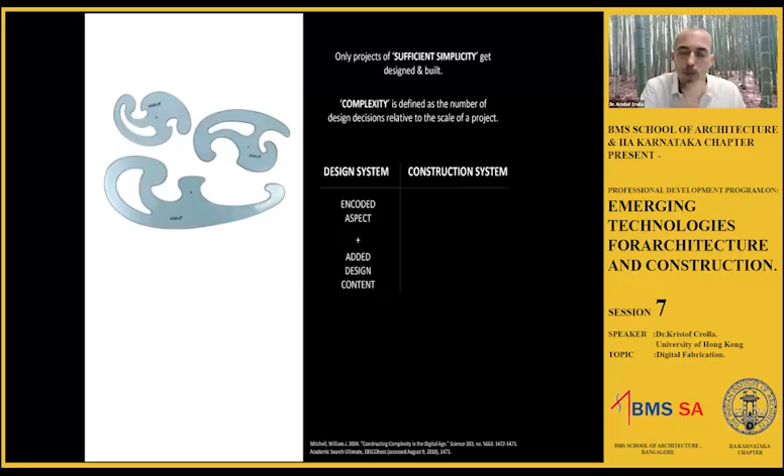Well, nowadays, these types of French curves, these rulers that were part of the encoded aspects of the design system, they've been replaced with NURBS modeling geometry, where without even needing to know any of the complex mathematics behind it, anybody can just draw a few points on the screen and automatically a perfect NURBS geometry curve will be generated in between it by the methods and the mathematics that have been encoded in the design systems that we're working with. So you can imagine that the complexity of designing or drawing curves has dropped dramatically, and our ability to clearly communicate those has increased dramatically.

So simplicity of construction is dependent on the tools and the techniques that we're working with. Now that's true not only for the design system, but also for the construction systems that we're working with. There too, you have encoded aspects and added construction content. For example, I'm from Belgium originally, where most of the architecture is made from bricks. If I would want to design a brick house in Belgium, I just need to give a few coordinates, and the craftsmen on site, with their years of expertise that they have, would easily be able to develop this brick project.

If I would do that in Hong Kong, however, where there's no brick architecture, it's all steel and concrete, the encoded aspects are much weaker. There's less of a craft available locally, so the complexity would increase because I would need to add a lot of construction content to make sure that they can implement it. Now, throughout history, innovative architects have not only worked in the added design content sector where most commercial practice takes place, but they've been addressing the encoded aspects as well, and both of the design and the construction system.

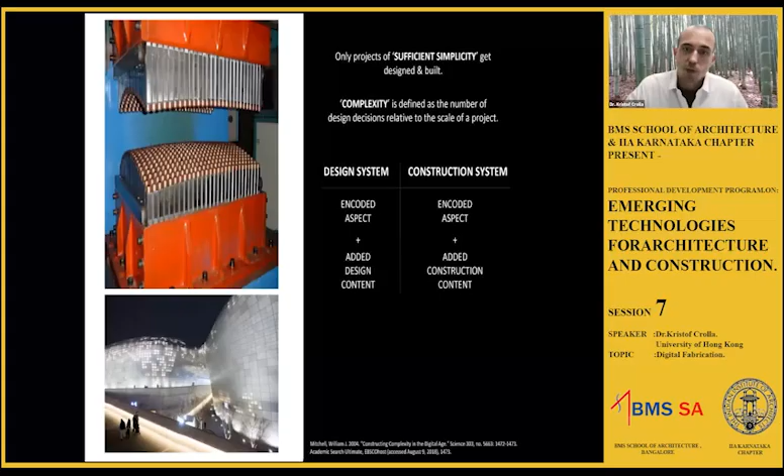So my claim is that innovative architectural design is more likely to happen if you tackle both encoded aspects and the added content to it, or at least there's a greater opportunity for innovation if you also challenge the tools that we're working with. What's very unique at this day and age, for the current generation of architects, is that because of computational technological evolution, we now have computational control of these encoded aspects, which dramatically opens the design solution space that we have at our disposal. So my work focuses on addressing innovation in architecture by tackling the encoded aspects and the added content in both the design and the construction systems.

Now, there's a few things that you should know to illustrate how paradigm shifting today's age can be. The first one is your washing machine at home has more computing power in it than NASA used to put a man on the moon. That's a fact. They don't make slow processors anymore the way they did back in the 60s. So computational power has become a resource that is available in abundance. It's everywhere to such a degree that we're even using it to do our laundry. So that's something that we can really tap into. Nicholas Negroponte, the founder of the Media Lab, said in '98 already that we should face it, the digital revolution is over.

Like air and drinking water, being digital will be noticed only by its absence, not its presence. And that's very true if you see how we communicate in this day and age. For example, here through this Zoom presentation, the digital technology is embedded in the system. We don't even see it. It's just there, and it allows for a radical change in how we communicate.

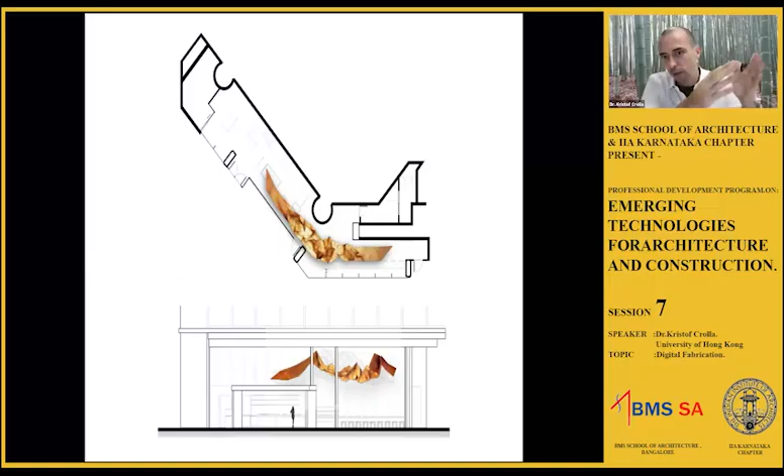And the story behind it was that if people take their time to enjoy their coffee, only then will they notice the slow changes that take place around them in a busy environment such as Hong Kong. And why I'm starting with this one is to illustrate that affect and spatial experience and emotional response to materiality is something that's central through our work. And throughout the talk, you'll see that I'll go from more affective, very emotional work to something that's much more rational and grounded. So please enjoy the first video.

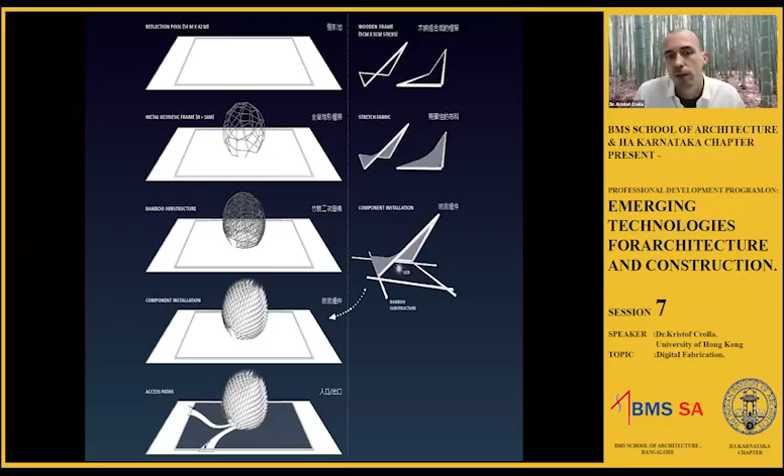So here you see the installation and the renders that we submitted for the competition. People would be able to go inside of it, where there would be all kinds of lanterns hanging, because the competition brief required a lantern of lanterns. And these are the actual competition documents that we submitted. So we said to build this, it's very easy. You just build a steel geodesic dome, you clad it with bamboo, then you put that component on it that I just sketched, and voila, you have the Burning Moon installation.

To our surprise, a few weeks after that, the client called us back and said, congratulations, you won. But under two conditions. First, burning in Chinese cultures has nothing to do with love or passion. Burning means destruction or sacrificing something to the gods. And there's no way that on the Moon Festival we're going to destroy the moon or sacrifice it to the gods. So we have to change the name.

It has to become Golden Moon. We said our joke doesn't work anymore, but whatever. The client said nobody got the joke anyway, so we agreed.

And then the second requirement was that we had to stick to this schedule, which was that from the drawings that I just showed you, we had 3 weeks time to develop a tender package, and then the government would organize a tender, and only 3 weeks before we would go on site, we'd know who was going to be building that. And then we would only have 11 days on site, 1 day for testing, 6 days of festival, and then 2 days of demolition, and that was it. And we're talking about a 6-story tall, complex, non-standard structure.

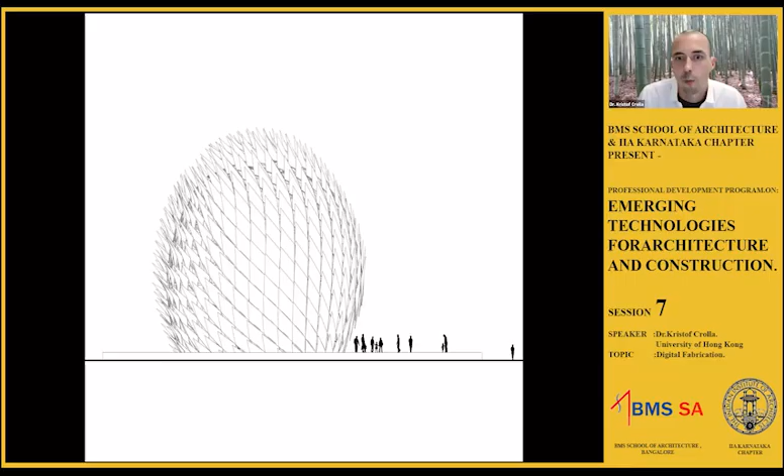The design didn't change much. We shrank the pool down a little bit, but in principle, it remained this pathway in the reflection pool that would take people inside this large dome structure, where they would basically be able to see this complex light show and spectacle around them.

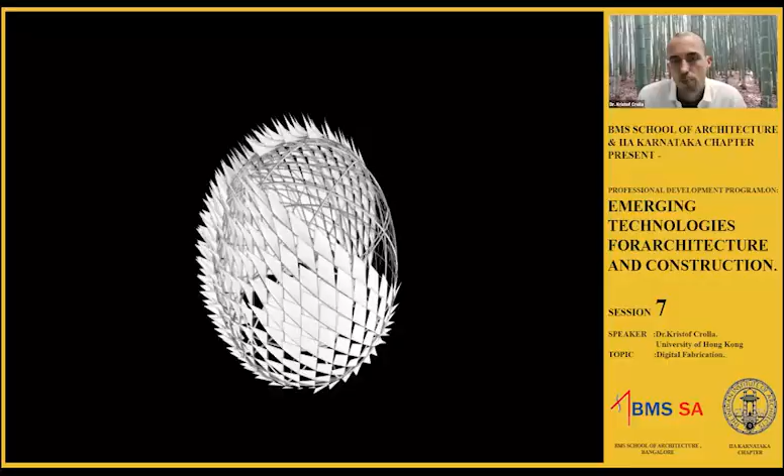And we were not allowed to make any foundations, so the structure was a simple steel base weighed down with a concrete slab, on top of which a steel geodesic dome would be placed that would be clad with 2 kilometers of bamboo to create a double curved diagrid. That would form the basis for 477 fabric flames that would be placed on top of this diagrid.

Now, typically, if you were to design a dome, you would follow Buckminster Fuller's Bucky dome principle, which is this idea that you break your dome down into repetitive patches that can easily be fabricated with exactly the same geometries. Now, the downside of that is that you arrive at a hermetically sealed geometry that you really need to break in order to get into. It's efficient, but it's much more static, and it doesn't have as much punch as other geometries might have.

So we looked around, and we found this formula from Fibonacci, a scientist from the Renaissance, that basically allows you to project geometry onto a sphere in such a way that you get quasi-repetition around the equator and still some orientation and originality around the poles. And basically that's the same pattern that you find in nature when you're looking at a sunflower, for example.

So we took that mathematical concept and applied it on our dome structure, tilted the sphere on an axis, and that produced this kind of oculus that you have on the inside, where you can still see the sky behind it. Now, to build this was a challenge, and the first thing we did in typical BIM strategy is to identify all the members that we're working with.

And the way we planned to build this was to break it down into several steps, where first we would build the steel structure, and then on the steel structure we would apply markings that would allow us to identify exactly where a second layer of bamboo would go over it. So markings on the steel structures with matching markings on the bamboo would allow us to span these big triangles that you see here. And then on this first layer of bamboo, there would be other markings as well that would allow us to map a second layer of bamboo on top of it. So that way we'd be able to build it without needing any drawings on site.

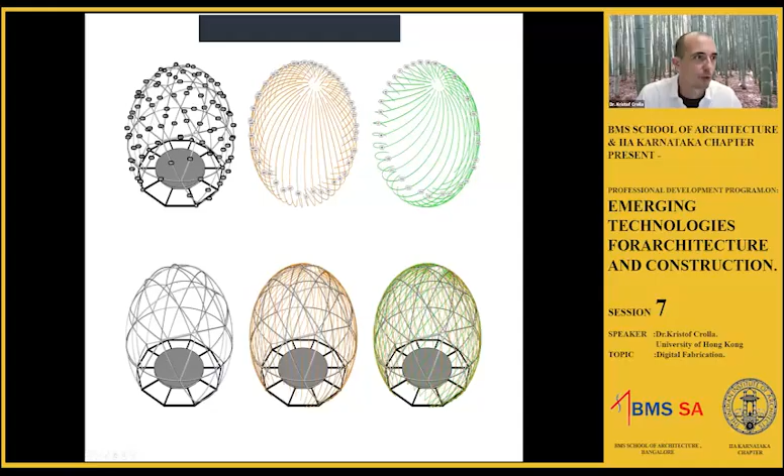The steel structure was straightforward. The contractor took us to Guangzhou, where there was this shipyard where every year they built around 20 200-meter long container ships by hand, pretty much, with very primitive tools from big steel sheets. And these are the construction drawings that we produced for that.

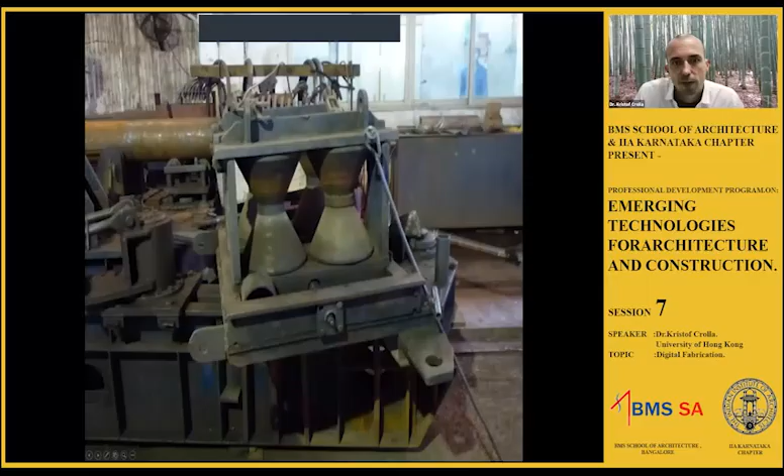And the way they were built is in a very simple way. It's similar to how oil pipelines are being built. So what you see here is an induction coil, basically a glorified microwave with which you heat up the steel pipes that are pushed through it. And then with these rollers that are manually controlled, they basically rolled all the pipes into their correct diameter. Now, when I asked how precise this was going to be, I was really shocked in the factory to find these guys.

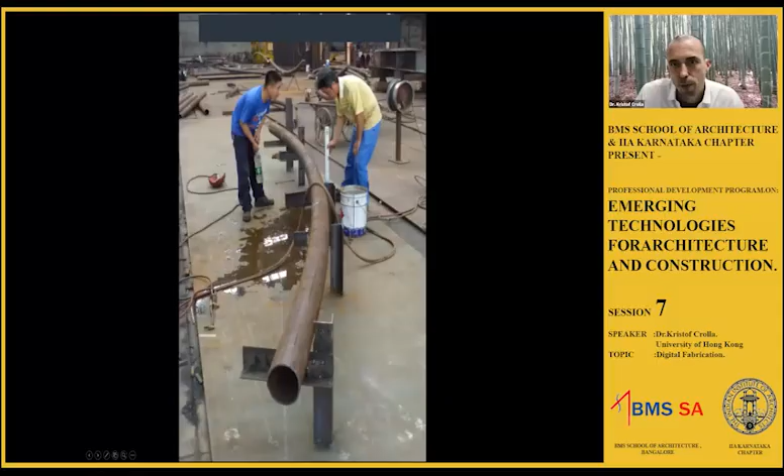So I don't know if you see what's happening in the picture here. So what they did is they made a mold on the ground of the perfect circle radius that we needed to have for our structure. And this is a bucket of ice water. This is a fan, and this is a blowtorch. And what these guys are doing is manually heating and cooling down these massive steel pipes to manually bend them until they fit in the mold that is required.

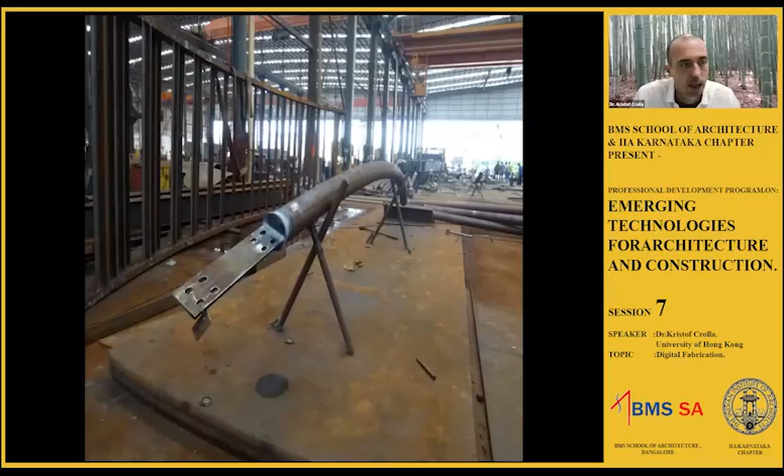And that kind of freaked me out because if the steel structure wouldn't fit, the whole project would not be possible. So when I asked the fabricator, can we please test assemble this before we go on site? Otherwise we're in trouble. They said there's no time. We'll have to do it for the first time on site. But luckily they followed our instructions nicely. Everything was nicely labeled as we had required.

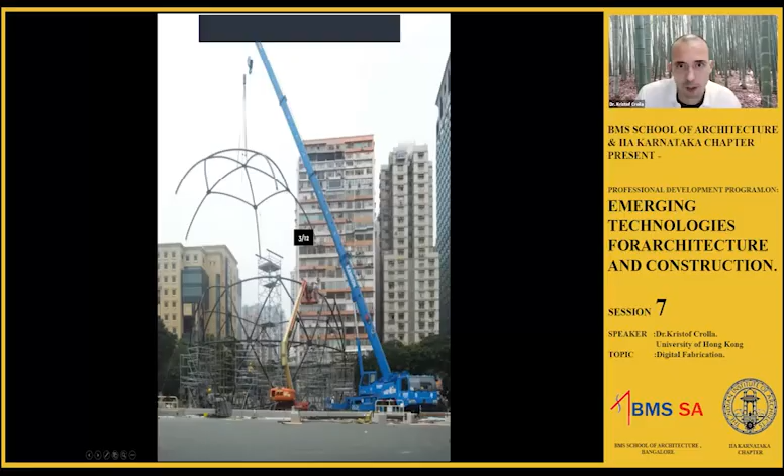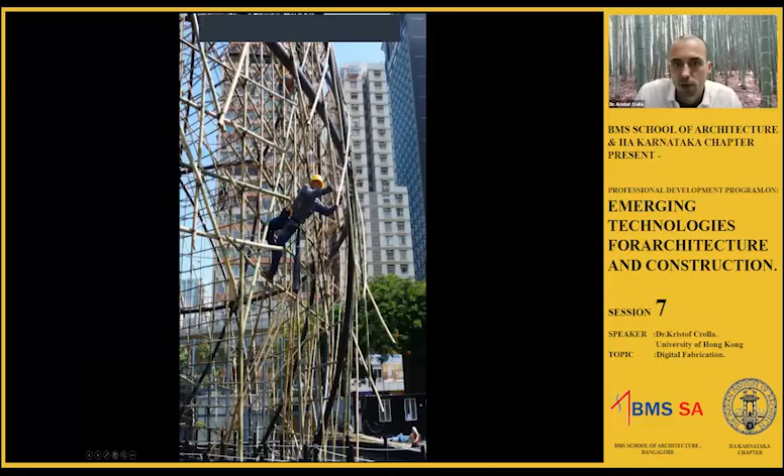And here you see them installing everything on site. So the grid that you see is temporary scaffolding, and the diagonal lines are the big members of the diagrid that are being bent over the steel structure by these guys here. So these are bamboo scaffolders. All of them, they're real Spider-Man. They wear safety harnesses, but they don't hook them up to anything. They're just using these plastic ties to tie the bamboo together. And here you see them on top trying to figure out the geometry at the very tip. Just following a very simple script applied in action.

Then on top of that, the challenge was to put the fabric flames. Now, unfortunately, the Fibonacci sequence produces unique geometries for each and every flame. So the way we resolved that was by clustering these 477 geometries that we had into 10 groups of the most common denominators. And we could do that because we knew the fabric was elastic, the hinges were elastic, so there was a bit of flex available in the system that we had designed.

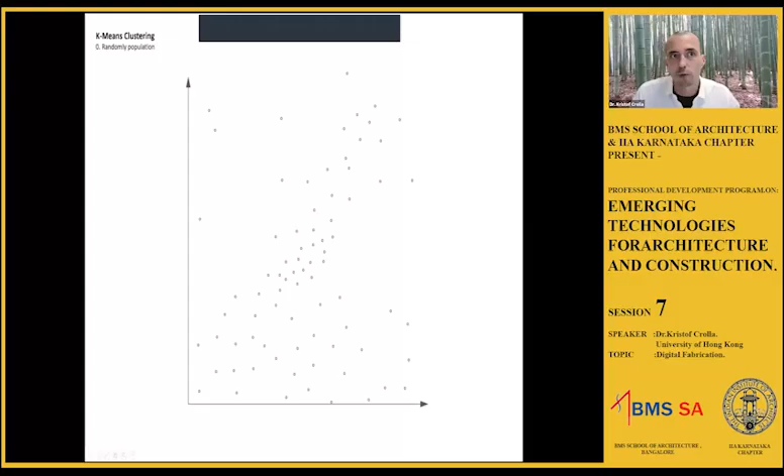So just to explain what the principle there is, if you have a data set that is multidimensional, doesn't have to be 2-dimensional like this one, and you want to group it according to its most common denominators, then one way to do that is by randomly placing as many points as you want to have groups. So in this case, let's say you want to have 3 clusters. And then what you do is you try to identify which points are closest to these centers.

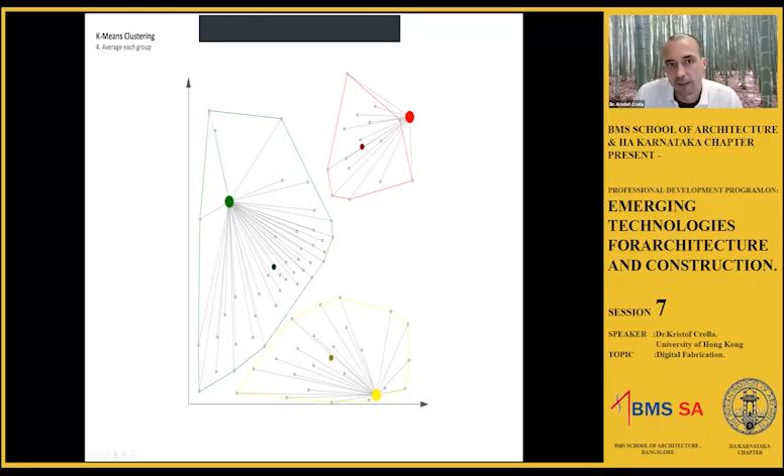Then you define the group that sits with each cluster, and you try to find the average of that group. And then you move your center point to the average, and you run that again and again. So you find the points that are closest to it, you average them out. You move your center point, you find the points that are closest, and you average them out. And if you run that several times, eventually you'll arrive at a stable setup.

So it's a looping script that you can just generate. It doesn't always arrive at exactly the same setup, but it arrives at a clustering principle that works very well. And you can do this for any number of seeds in any number of dimensions with any number of populations.

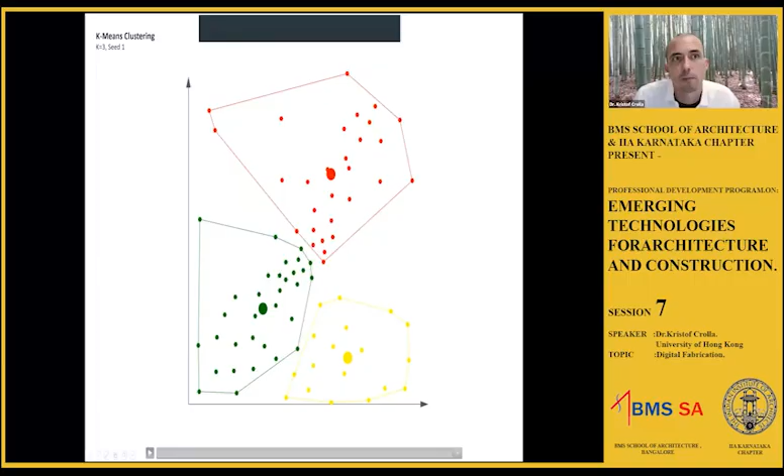So here you see an example of 500 seeds with 15 clusters, and you see the system still finds its solution very easily. So here you see it running again. With that principle, we managed to snap our two-dimensional or multi-dimensional geometry here into some common groups.

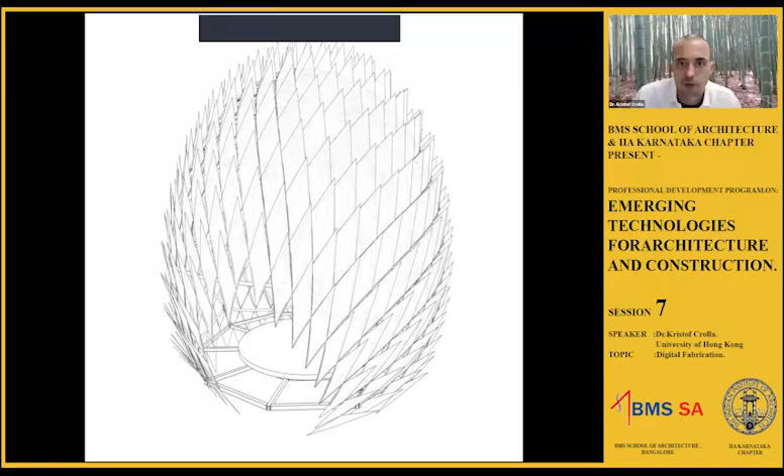Unfortunately, the client told us we couldn't do this with white fabric because white lanterns in Chinese culture are only for funerals, so they forced us to add a layer of color on top of this. But here you see in this matrix that we still had a very strong rationalization of our geometry. Rather than producing 477 different flames, we still had a strong repetition here.

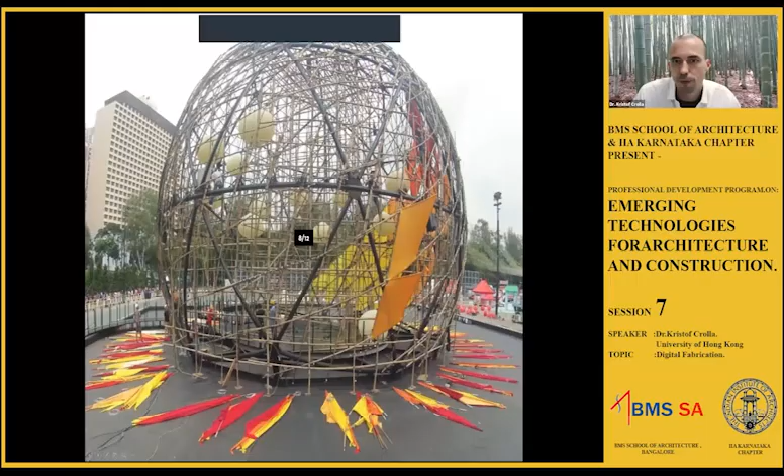Once we had that, all we had to do is figure out the details on how to connect things. Here you see us very quickly cutting the fabric to the correct size and on site using bamboo and plastic electrical tubing to make hinges. We made these simple flames that could be placed over the bamboo diagrids and fixed with just metal wire and zip ties in a very short amount of time. So in under 15 minutes per flame, they were able to populate the geometry with the flames.

Now, while this was going up, we were using these LED light dot strings that in Hong Kong they use to decorate their facades around Christmas or Chinese New Year. So we recycled that technology and made basically a 1 megapixel spherical screen on top of the dome that allowed us to run videos over it.

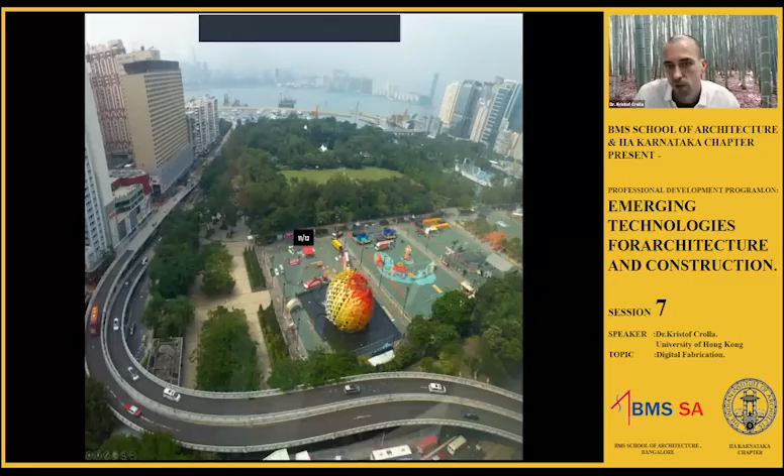And here you see the day before the opening, when the pavilion still kind of had a bad hair day. Now, digitally, it's very easy to very precisely identify exactly where each flame tip needed to be, but it's impractical to demand that in a quick and fast construction site like what we had here. So instead, what did we do?

We came up with a system where we'd have metal wires running from the top of the sphere all the way down to connect all the tips of flames that were part of the same strip. We'd be shouting from the ground to this guy here that flame needs to be a little bit more, a little bit less. We did that for say 1 in every 10 or 15 flames, and once we roughly had the haircut direction fixed, we told the craftsman just to follow the flow and have all the other flames follow the system, which is much more practical and time effective to implement.

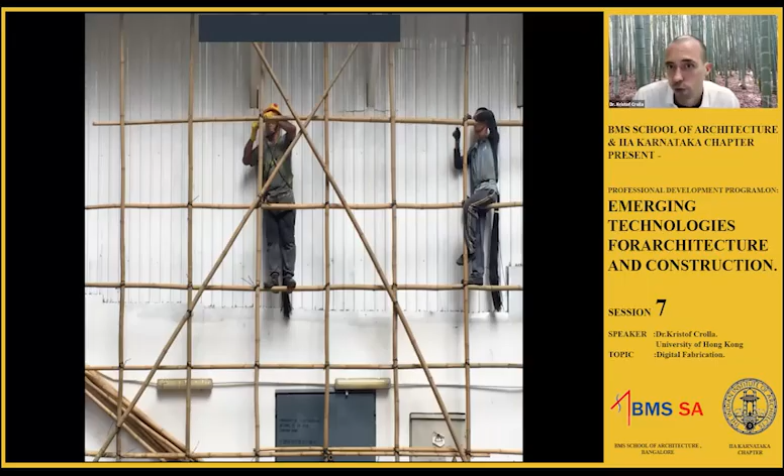And the way these bamboo craftsmen here in Hong Kong work is they use rules of thumb like leg lengths and shoulder heights to define these grids, and some simple knots that I can teach you in 15 minutes to make these amazing structures. Now, what's really nice about Hong Kong is that for the religious festivals like Cantonese opera, every year when there's no COVID, typically over 40 of these temporary bamboo structures are being built as well to house Cantonese opera events. And these are very, very nice structures using very simple grid systems that are hoisted and assembled on site.

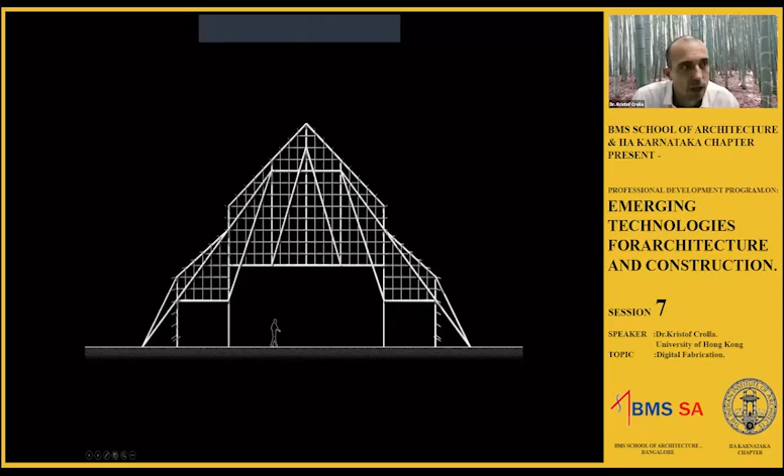And a few years back, when William Lim, one of our most celebrated architects, was asked to design the biggest bamboo theater Hong Kong had ever seen, all he could really do was scale up this typology to the point when the bamboo material would start to fail, and they would start to replace the bamboo with tree trunks to make these big, large theaters.

So a few years back, when we were asked by the government to build a bamboo cover of this square here in front of the ZCB building, the Zero Carbon building, with a brief to host public events, showcase bamboo potential and promote sustainability, we thought this was a great opportunity to challenge what event spaces could be built with bamboo. And we did this by tapping into a very unique property of bamboo.

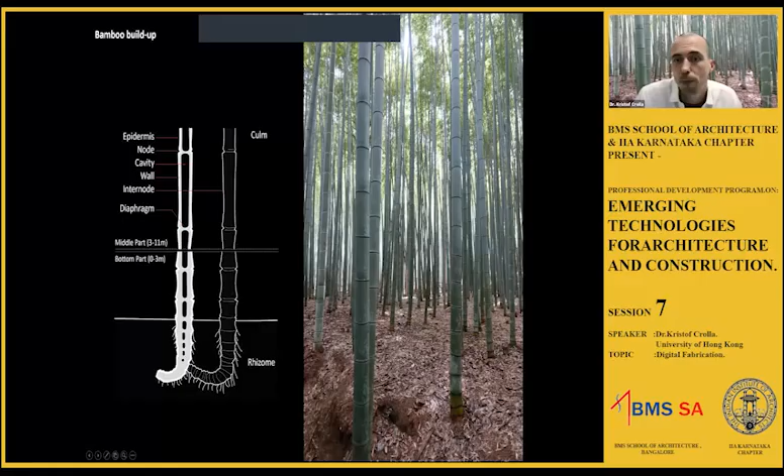So bamboo, as you probably know, is a hollow culm with diaphragms to separate these nodes. And these diaphragms make bamboo incredibly good at bending because they prevent the buckling of the hollow pipe if you would bend it. Now, this bending property of geometry is something that with digital tools, we can very easily simulate.

So we can very easily give a behavior to a curve where we can predict how it would straighten itself out, or how it would bend if you brought points close to each other, or how a network of curves would behave. With free available tools online like Kangaroo and Grasshopper, this is possible.

The challenge, however, of working with bamboo was that bamboo is a natural material. Every column is different. Here you see a series of bamboo culms used in our ZCB Bamboo Pavilion, all with exactly the same specification. Now imagine a steel structure where all your members come in with the same geometry deviation—it would be impossible to build. So our concepts of precision and tolerance need to be totally changed when working with a natural material.

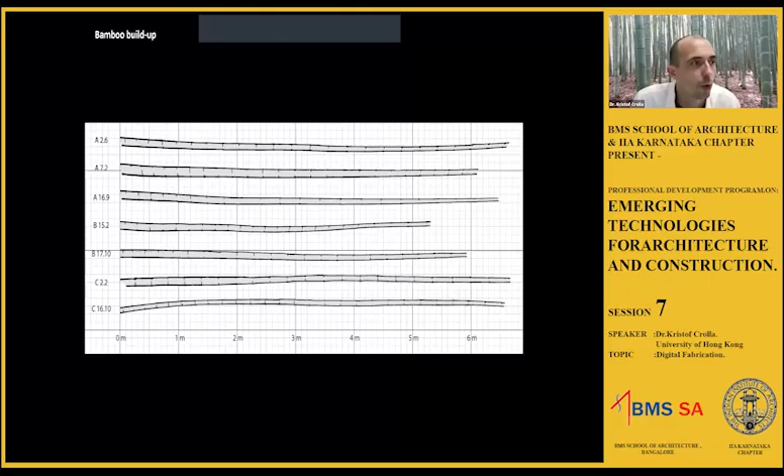And still, we were able to make an event space to scale that looks radically different from the typologies that typical Cantonese bamboo craftsmanship can produce. So how did we manage to do that?

Well, we started off with a design competition where I hired 20 students and split them into separate groups. The brief was to use split bamboos to come up with a concept of how the tectonic system would work, and to do this in an iterative fashion: make a model, identify the problems, and improve it.

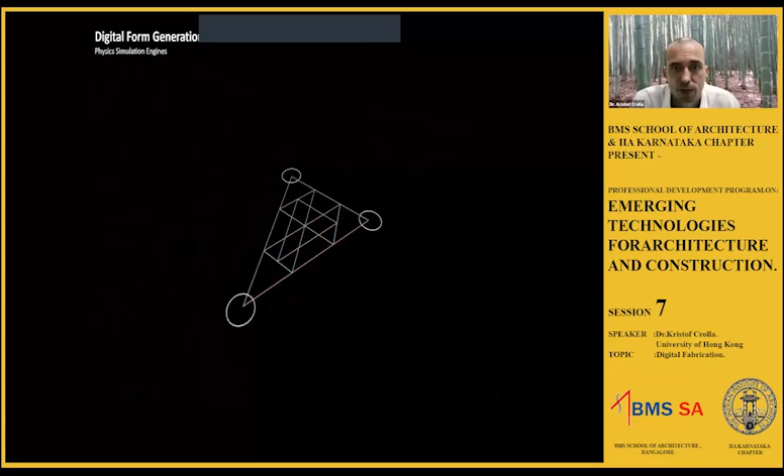Then my team took this on and turned it into a digital model, bringing in all the site parameters. Through a lot of trial and error, we identified the input topology of our physics simulation engine—lines given a behavior similar to bamboo that tries to straighten itself out—and then identified the forces needed to bend the geometry so it would wrap around these fixed circular foundations. So we didn't draw the final curves; we drew geometry, gave it a behavior, and pressed play. The geometry emerged from the digital simulation engines we had set up.

With that, we arrived at this bamboo pavilion spanning 37 meters, which to my knowledge is still the largest bending-active bamboo shell built today—hopefully not for long. And it became this beautiful structure.

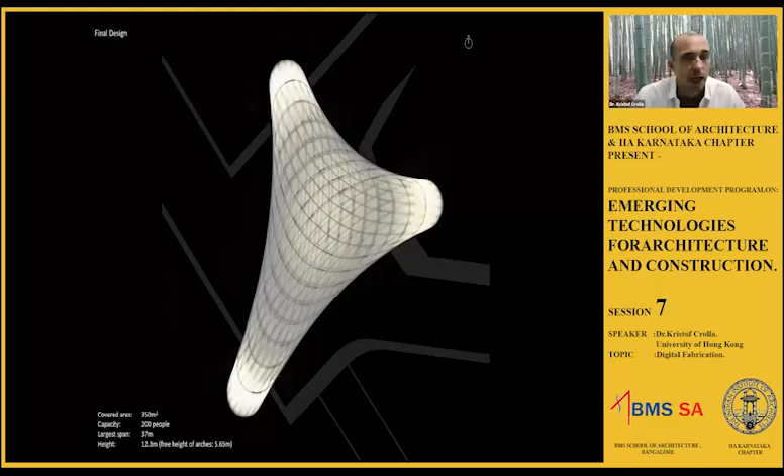How did we build this one? We worked with Mao Jue, a giant timber bamboo species that grows close to Hong Kong across the border. Different parts of the world have different species—India has a different timber species that can be used. These are rather thick columns that grow in the Guangdong province, and they're harvested with very primitive means from bamboo plantations, then centralized into a central collection point.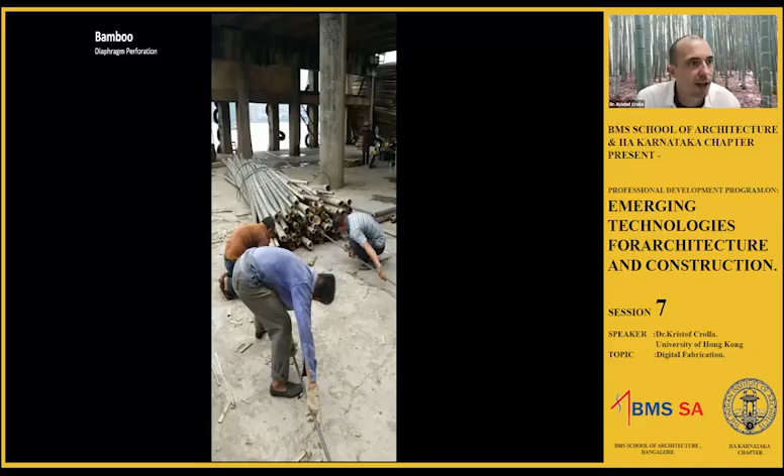The first thing you need to do when working with bamboo is to treat it. Bamboo can be permanent if designed so it isn't wet—preventing water exposure—and protected from UV light, since sun exposure will disintegrate it over time. You also have to treat it against biotic attack: bugs, mold, and fungus. There are many treatment methods; a cheap and environmentally sustainable way is to submerge it in a borax and boric acid solution, a natural salt solution. You make big containers, perforate the bamboo so the liquid can get inside, then submerge it in the salt solution for 24 hours. Basically, the sugar inside the bamboo gets washed out, and you end up with bamboo that can be permanent.

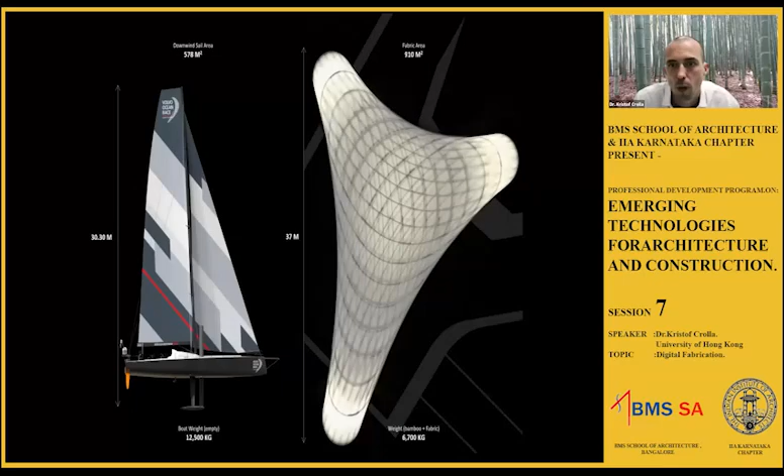While we were treating the bamboo, we were preparing the foundations on site. To illustrate why these foundations were important—you've probably seen the Volvo Ocean races on TV. One of these boats weighs around 12.5 tons and has a downwind sail area of 578 square meters, which is quite large. Our structure weighs around half that and has almost twice the sail area, and we need to withstand typhoon forces.

So the foundations were essential in holding the pavilion down. So now, the way the load path works is that wind blows on the fabric, transfers the load to the bamboo. So the fabric needs to be very tight. And then the bamboo transfers the load down to the foundation. And that connection is absolutely crucial because you need to prevent lift.

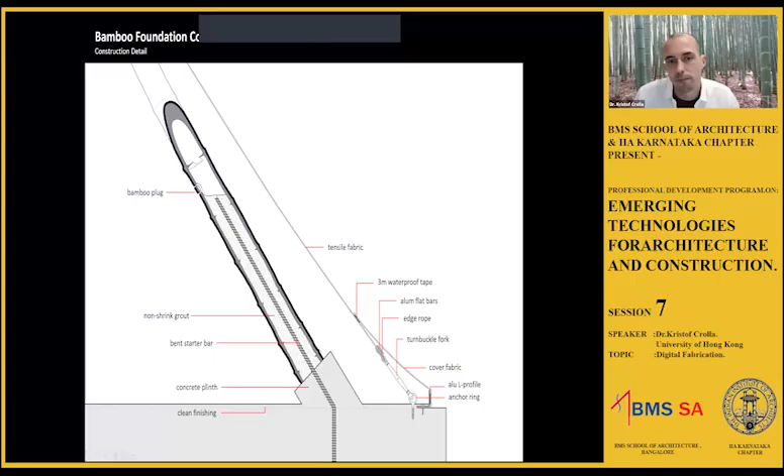And the way we did that is we borrowed the detail from a Colombian bamboo architect, Simon Velez, and basically cast a rebar into the concrete, from the concrete into the bamboo, using the interior profile of the bamboo and non-shrink grout to prevent the bamboo from sliding off the rebar.

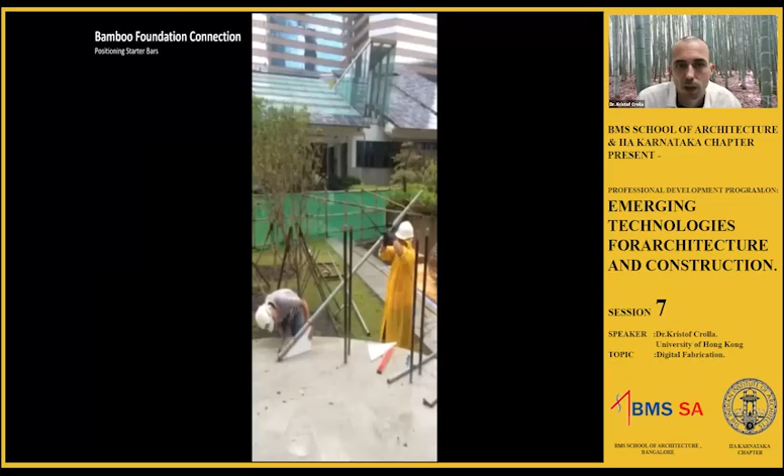So how is that done? Standard foundation, rebar sticking out, and here you see us just manually with a steel pipe and some 3D triangles printed with a simple A3 printer until we're roughly where we need it to be. So here you see the rebars waiting.

And then the little sockles at the base to prevent the bamboo from getting wet were just made with a PVC pipe that was cut to the correct angle that we extracted from our digital models. And in a very cheap and effective way, we managed to make these beautiful little sockles to hold the bamboo at the base. Then the bamboo arrived to site. Everything was nicely cleaned, protected from the sun.

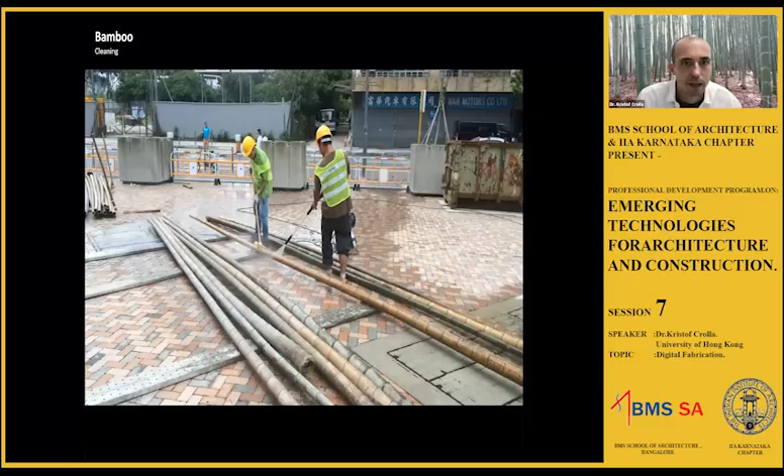And the next challenge was, how do we translate this three-dimensional model, which is basically a data cloud, into something that can be built on site by people that don't speak English, but also don't read plans typically. So what we did is similar to the Golden Moon. We identified the line work and where they would intersect, and we unrolled all the curves digitally and we kept track of where one member is supposed to intersect with another member.

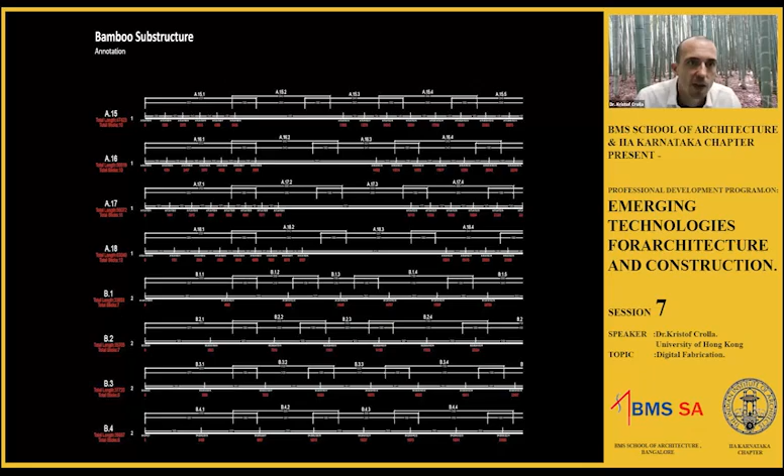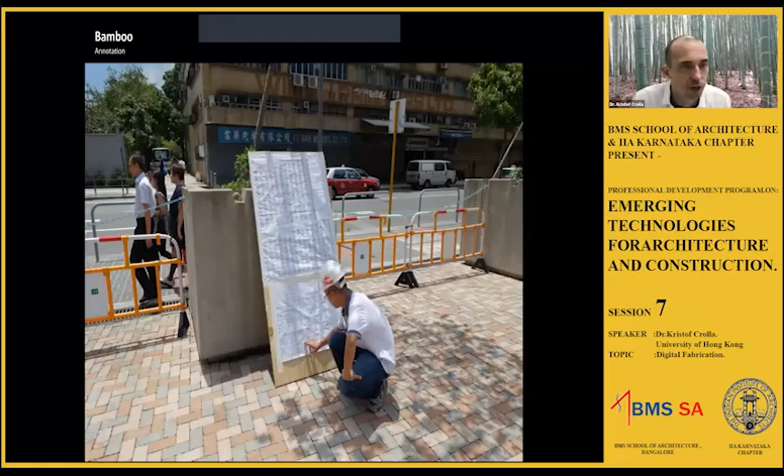So what the contractors had to do was just read our spreadsheets, get the bamboo pole, cut it to the right size, number it, and then we made this 40-meter long bamboo table in which they would put all the members together. And using metal wire this time, we would tie all the bamboo columns together into these 80-meter long or 60-meter long interconnected bamboo twigs. And then using a simple ruler, a Sharpie again, and a sticker, they would mark up where that pole is supposed to intersect with the other directions.

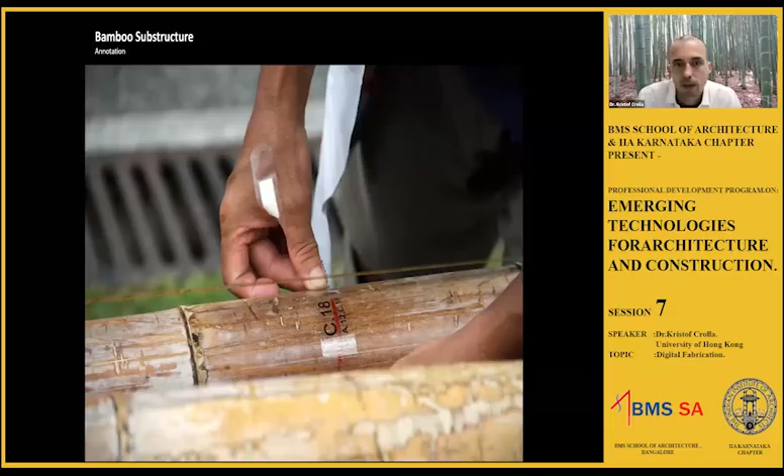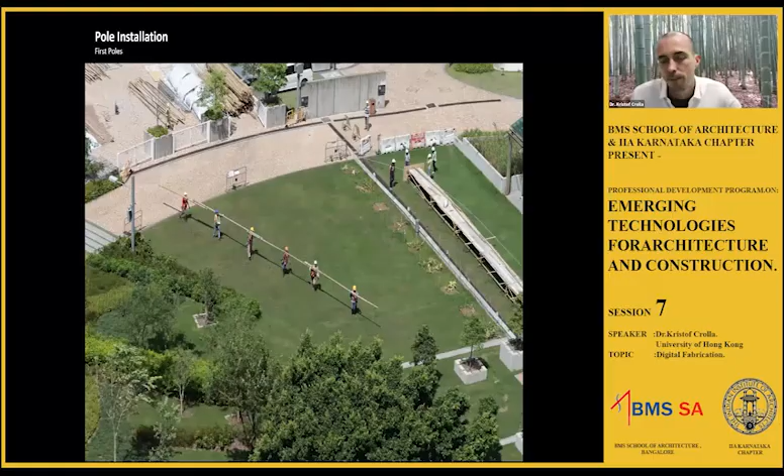And then, after we built a temporary scaffolding on site first, they could basically hoist these interconnected bamboo sticks onto the site, on top of the structure, and slide it over the correct rebar. And then for the first 10, 15 poles, we did project some of the coordinates down to the ground. But basically the idea was that the more poles you have up there, the more intersection points you have to correctly place the next layer.

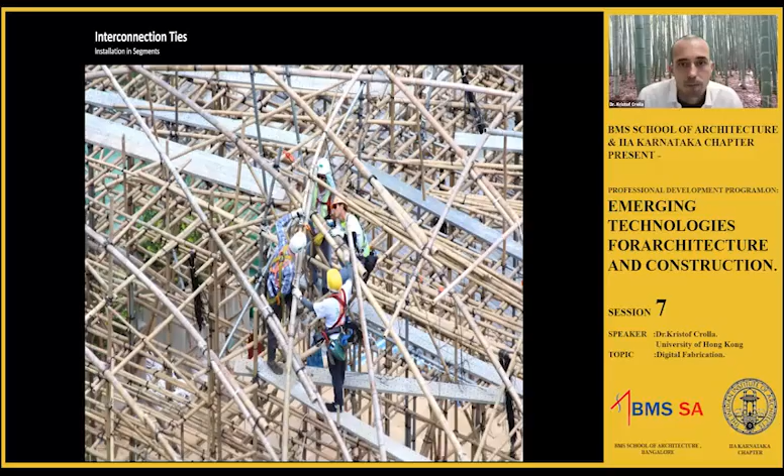So without any heat bending, no added energy, just cold manpower, the bamboo gets bent over the structure itself on site, and then using simple tools like these wedges, the craftsmen on site would try to match the sticker labels as close as possible and basically tie the structure together by hand. So this is what a point in our 3D model becomes. So you see it's like a cloud of approximation. It's not super precise, but it's the only way that a natural material would be able to find its solution.

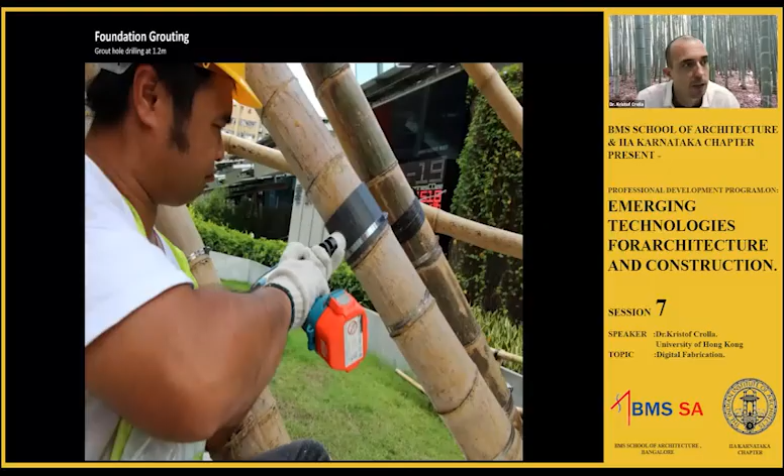So here you see the structure finished. Now once we're done with that, we had to connect it to the foundation. And for that, we first centered the bamboo poles to the rebar, just drilled a hole at the bottom of them, and then sealed off the base, and then used the old fire hose that we cut up to just manually squeeze the cement into the bamboo poles until they were totally full, which you could hear by tapping on the side of the column, creating this very simple, nice detail that with a metal clamp was locked in place.

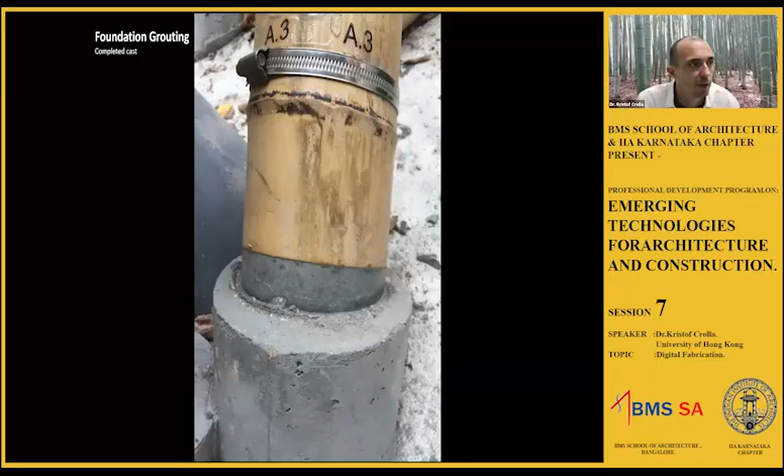So here you see the complexity of the geometry being built very simply with primitive tools. So then this is the structure when it was completed. Then the challenge was to put the membrane on top of it. And as I mentioned, this needed to be a tailor-made suit.

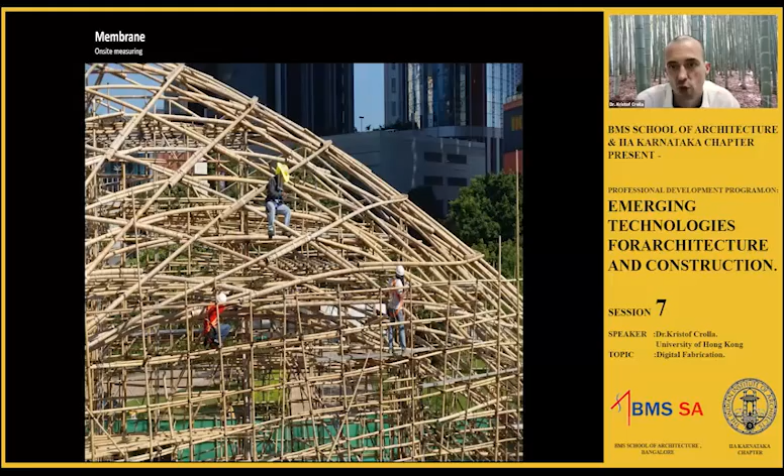Otherwise, if the fabric would flap in the wind, it would just tear apart under a typhoon. So for that, what we did is we measured all the triangles by hand on site. And I realized that everybody on site had a smartphone in their pocket anyway. So we set up a shared Google Doc in which everybody just punched in the correct numbers while they were measuring.

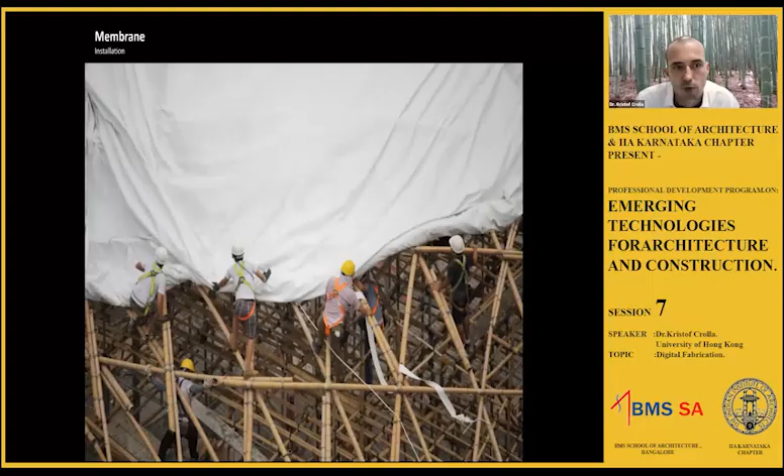So here you see the tailor-made suit fitting nicely on top of the structure, and here being tied on the inside. Everything was tensioned up, the details were fixed, and the scaffolding was removed. And here you see how light, how thin the structure is underneath it, and how large the span is. So simple details were fixed and finished off afterwards. And that's the final structure.

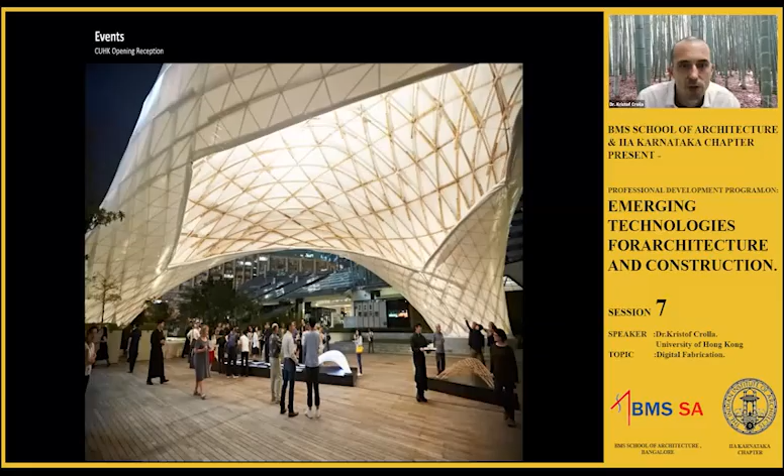Here you see from a bottom perspective the simplicity of the topology, so a triangulated grid that folds down onto itself. And yeah, this is how the structure basically allowed the design solution space of Cantonese bamboo craftsmanship to expand into an entirely different type of architecture without changing the craft much, just changing strategic aspects of the encoded design tools and the encoded construction tools.

Now, this project got a lot of great attention, of course, which is always nice, but Hong Kong doesn't need anything like that. So since then, my team and I have been pushing hard to find applications in areas of the world where they are more needed. So this is an example of something that we designed in Myanmar, in Yangon, where there's this pipeline that cuts all the way down to the heart of town.

And on both sides of the pipeline, informal urban farming is taking place. And here on the right side, there's a little school that also was in need of a playground. So what we decided to do is to design this marketplace / playground on the pipeline that these local communities could build themselves, with our help, of course, for relatively low cost, a very nice and dramatic space.

Now, unfortunately, this project didn't go ahead, but we're right now pushing with Blue Temple, which is a local architecture practice that we're working with, to push for this shell, for which all the groundworks have already been done, which would be a nice bamboo cover of a playground in a park somewhere there. So hopefully in the coming years, we'll be able to see this one built.

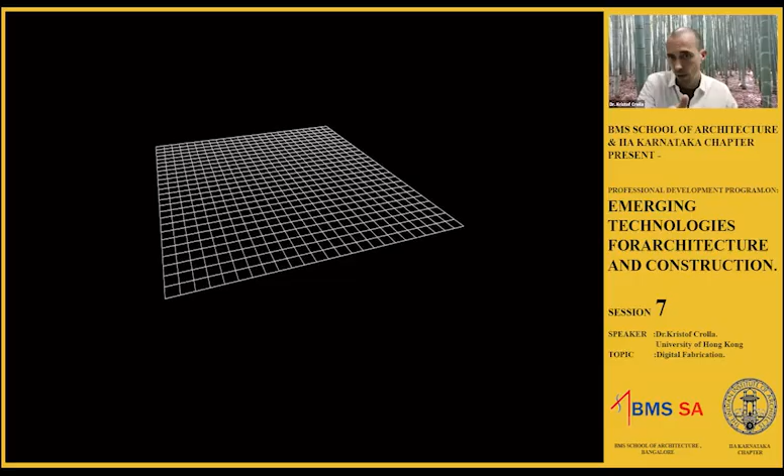So if you make a grid with no shear rigidity in its joints, but that is equidistant, then that's a very easily buildable grid. And that can easily be deformed, as you can see here. So this is an easy thing to make, and just a twist. Now, this same simple system, if you squeeze this through a ring, then these types of geometries are also possible with it. And if you trim off the base, you basically end up with a double curved shell that has a very easy construction principle behind it.

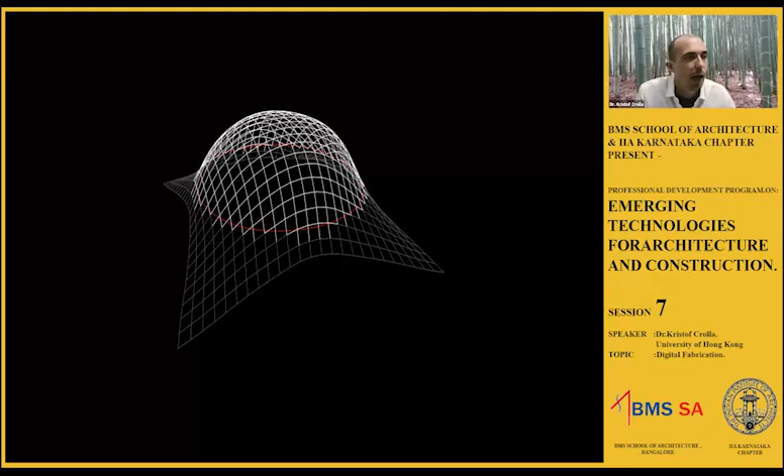Now, with my students, we tested if this would also be possible with bamboo, and we built this little grid shell here on the rooftop at CUHK a few years back in only 2 or 3 days' time from very, very thin bamboo sticks. And the double curved geometry basically creates a very strong shell. You can even hang from it. So that's cool, that's exciting, but it's a very dry bubble geometry.

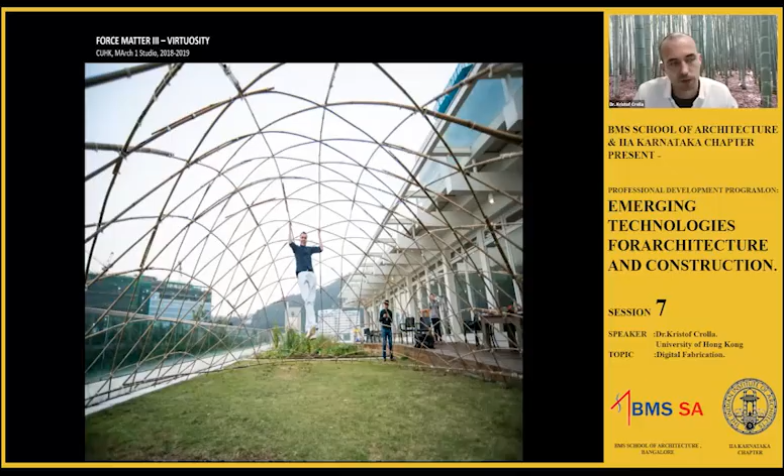So with my team, we started thinking, how can we push that geometry again into a different, more engaging environment? And we found out that if you take an equidistant grid like this one here, and inside all your squares, you add a few pentagons as a singularity, then you can actually make columns inside your bubble. And these can still be distorted as well. So you can arrive at a very different design solution space that doesn't per se make the construction much more difficult.

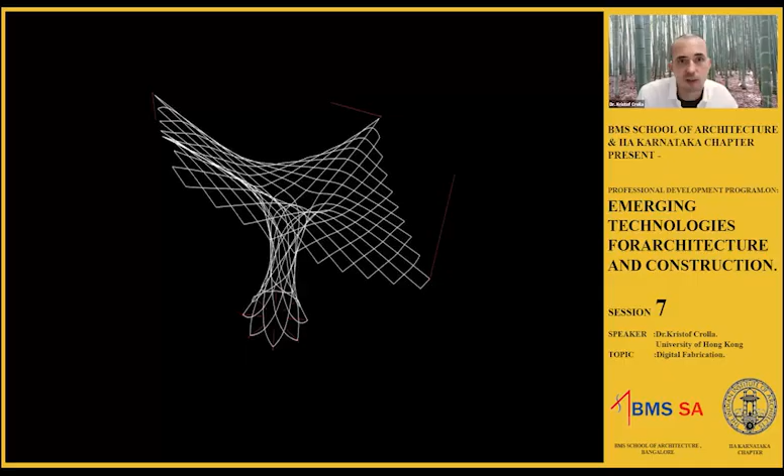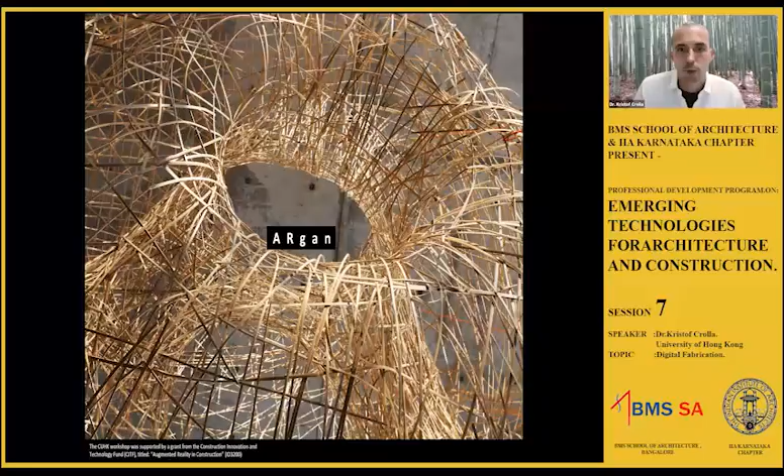A smaller bamboo project after that is pushing the construction technology, embedded construction technology, to a next level. So here we're starting to see how augmented reality can continue to expand what we can actually do on site. So I don't know if you've ever had one of those on your head. So this is a HoloLens by Microsoft, and it's basically a pair of glasses that are see-through, but with a screen in between, allowing you to project holographic content on top of your hands.

And augmented reality technology, it's been around for a few years. It's also in a lot of our smartphones already. You may have seen applications of that as well. So it's something that many of us carry in our pockets already. So we thought it'd be interesting to see if we could create a collaborative artwork with 30 students working from the same model over 3-4 days to build an art piece without knowing what the architecture eventually would be.

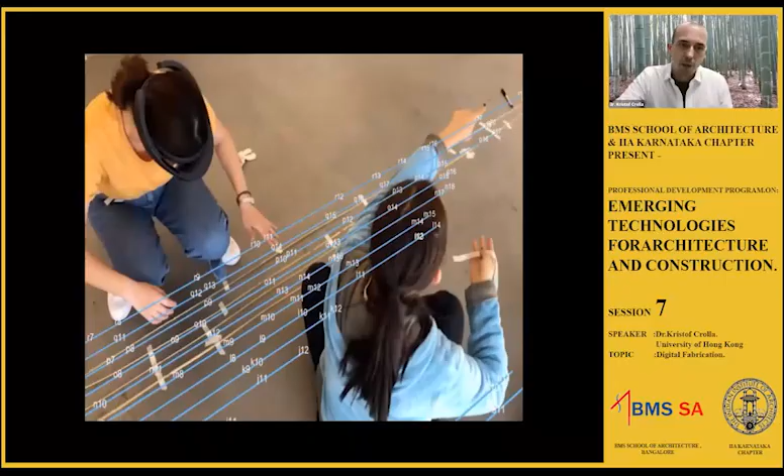And as a challenge, we made the most complex shape that we could possibly think of to be built with bamboo splits. And the way we built that was by using these HoloLenses, this time to not use rulers or markers, but direct holographic instruction overlaid onto the hands of the people to mark up bamboo splits and then bring those together. Using these, again, holographic guides that would be virtually available, but not in reality, only visible to the people that would look at them through their phones or through the HoloLens. So this is what somebody would see if they would look through the lenses, or this diagram.

So this is a very, very fun, quick project that we did with a group of students that could dramatically open up the complexities of what we can build on site. And this is the video for that.

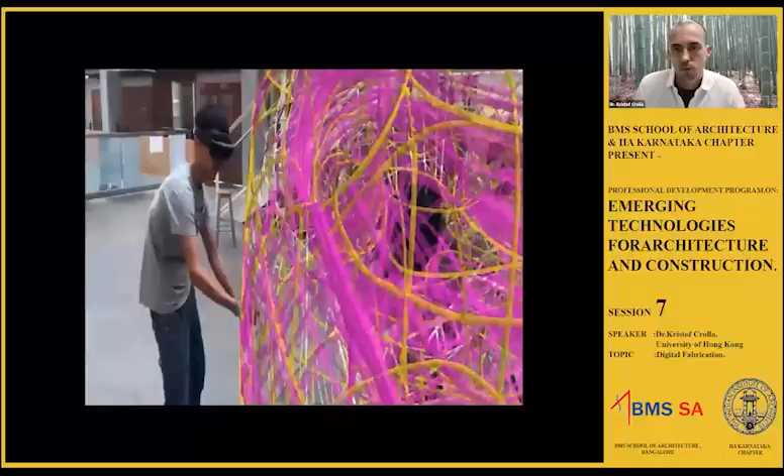So that's fun. So with that technology, we're now starting to plan ahead, hopefully once COVID is over, to see if we can actually build a maybe more complex structure like this one. And a few months ago, we did a trial already, which you can see here, of one of the legs, where the students were actually using, again, these holographic instructions to mark up and then later on also assemble.

Yeah, video's jittery a bit.

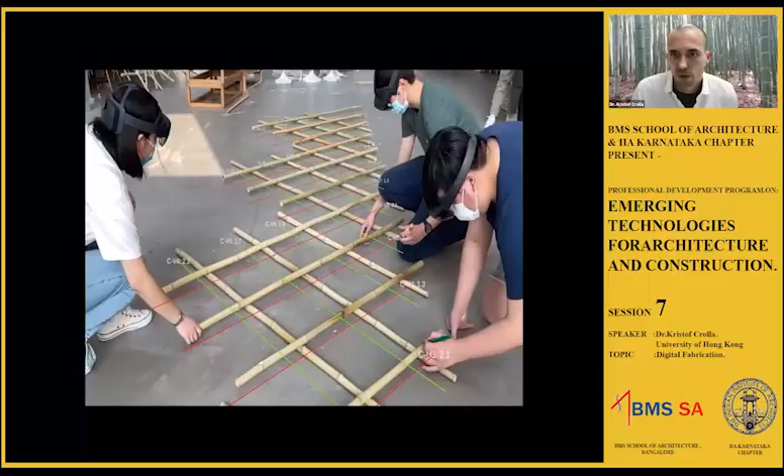Assemble basically components of this, and these holographic guides become the drivers of the assembly process. And in a relatively short amount of time, they were able to build this one leg of the structure, which is strong enough again to hold somebody hanging from it.

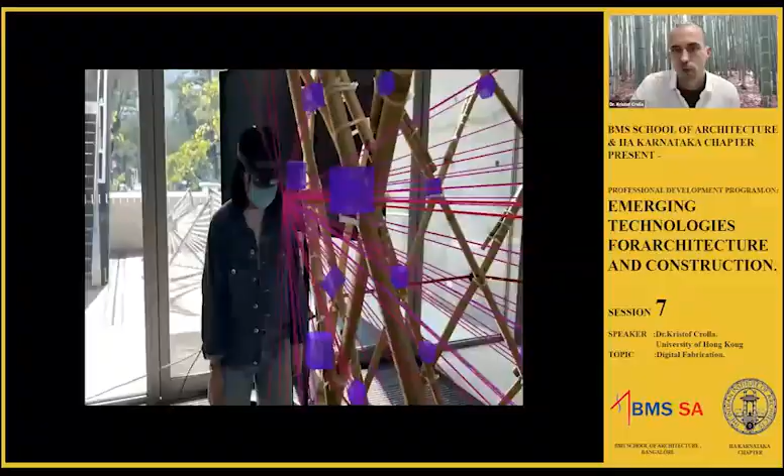What's really interesting though is that these lenses embedded in them have cameras as well, that allow you to, if you place these little QR codes onto the structure itself, track in real time what the as-built is that you have created. So that opens up all kinds of opportunities for real-time feedback of the structural performance, for example, of what your as-built would generate.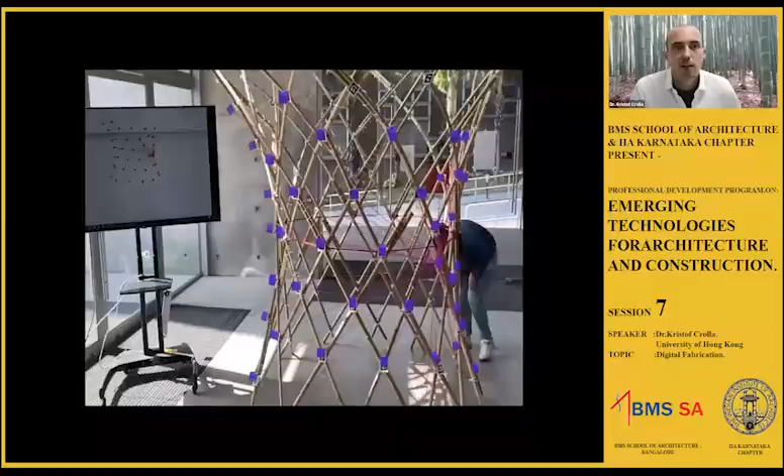So here you see the lady going around, and on the screen in the back, you see what it is that she's looking at, and the computer automatically recreating the as-built model. So that's fun. That's some of the latest work that we're working on here.

To wrap up the talk, I want to show you that the concept that I'm talking about here is also applicable to all kinds of different materials. It doesn't have to be bamboo at all. So this is a project that we did last year that got some nice attention as well. It's a mountain retreat in Hokkaido, Japan, that hasn't been built, so it's a concept for it. And the idea behind it is very simple.

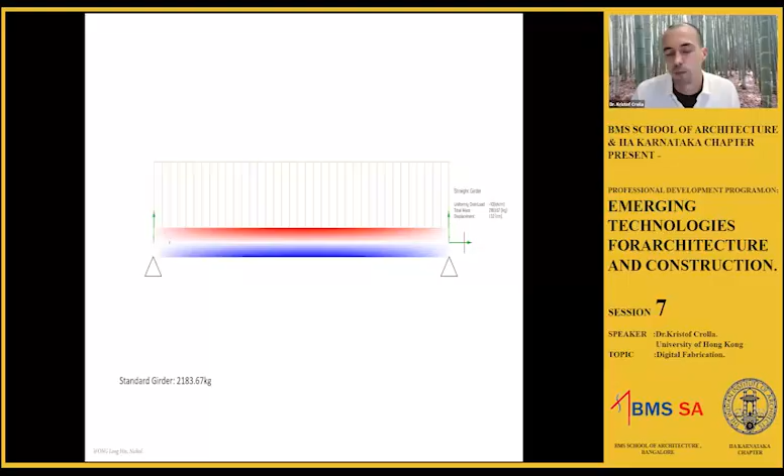It's very performance driven. If you take a beam and you span a certain area with it, then you need a certain amount of material to withstand the fixed load. Now, that material is not optimally used because you have a neutral fiber in the middle. And basically, the structure collapses if only in one part the material reaches its maximum stress. Now you can optimize this further by, for example, changing the shape of the geometry.

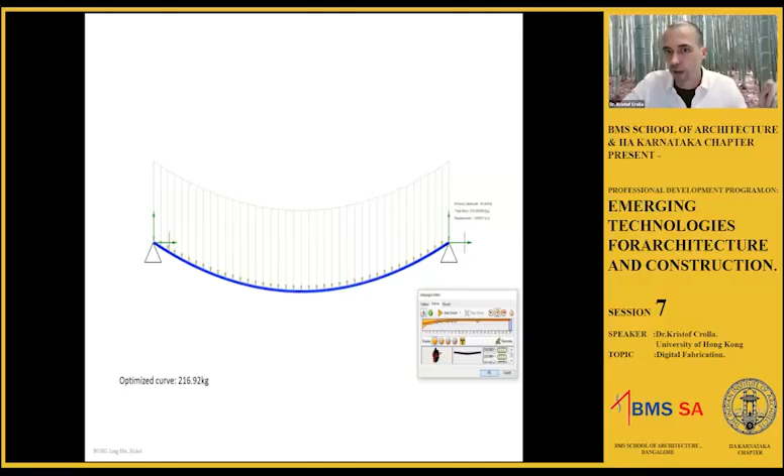But if you would set up an evolutionary algorithm to find out what geometry would be the very best to withstand a certain load for the least amount of material, you'll automatically end up with a chain line or a catenary, which is under pure tension everywhere. And you just saw that the weight reduction can go up to 90%. So there's a huge material saving possible there. This is not something that we invented.

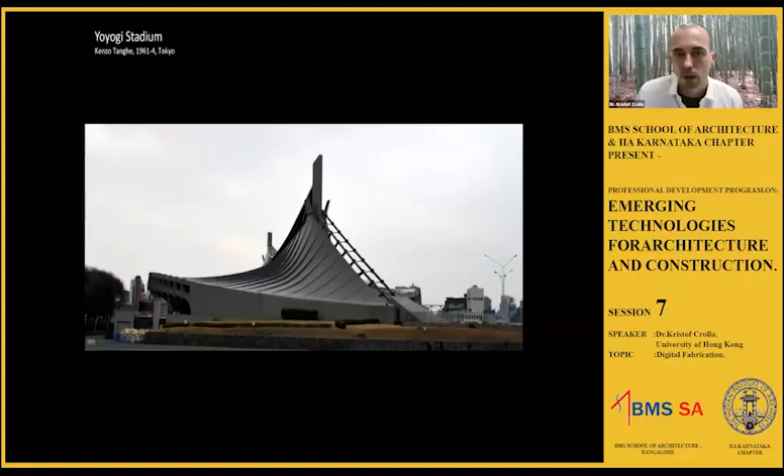The Yoyogi National Stadium by Kenzo Tange that you may have seen in the Olympics a few weeks back applies this principle using steel roof profiles to define the geometries of its main hall, or the very, very nice geometry of the smaller hall next to it. So it's a very nice, elegant system.

Back in the late 80s, Frei Otto again applied this principle for glue lamination in the Wilkhahn manufacturing pavilions that you see here. So the concept there was that you make a central portico and then suspend wooden profiles from it. So here you can see all the steps of the project.

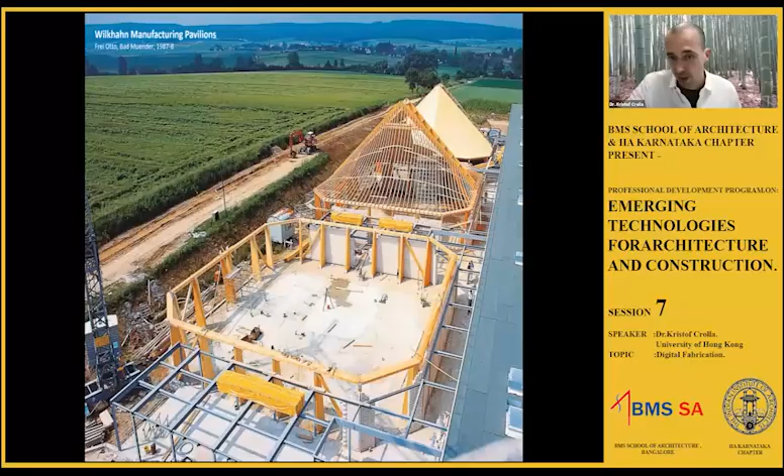Now, there's an efficiency here because each project has two symmetry axes, and there's 4 of them in total. So there's a 16-fold repetition, which basically allowed them to repeat each geometry mold at least 16 times. So that allowed them to make the complex geometry quite straightforward. But each and every one of these curved beams is different and unique, and therefore challenging to make.

But you can see that still, because of the double curved geometry and some very, very simple detailing, simple wooden floor planking, he arrived at this very light, very elegant, very warm finished roof that you see here. Now, to make these curved glue laminated beams is easy if you have one of those very heavy adjustable pneumatic presses, which exist, like this is in Rubner Holzbau, where they have a large curved glulam beam producer.

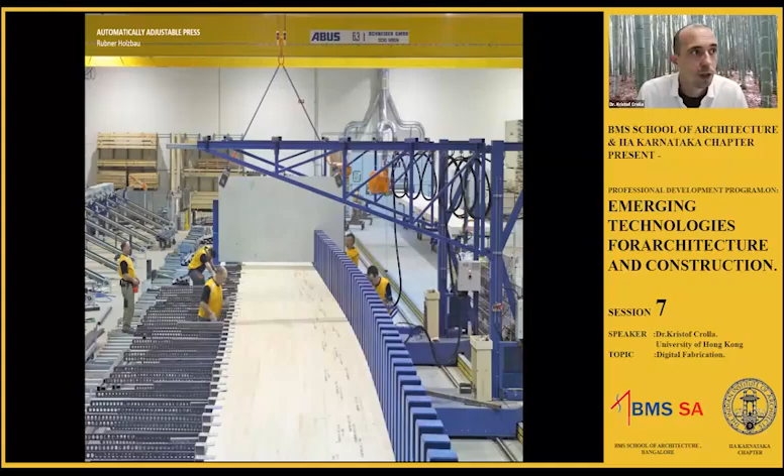But if, however, you want to build curved glulam in a low-tech environment, like, for example, this bridge that was built recently in Malaysia, then you're in a very different construction reality. So for the members of this bridge, they used very labor-intensive, manually controlled steel pressure vises that you see here. And you can imagine that if you want to make a structure where each curved beam is different and unique, that would become prohibitively expensive or labor-intensive.